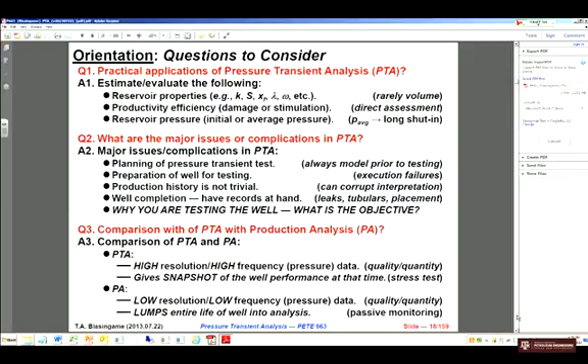So this is actually 30 years old, a little more, but it's almost exactly accurate to what we would be looking at today. Not a lot of things have changed since then.

In this case, you have a seal assembly here, so there's a wireline comes down through here, and you have a gauge, but this is sealed off. Being sealed like that means hopefully we don't see too much pressure come up. But this one over here actually has a valve in it that isolates the bottom. You've got packers in both.

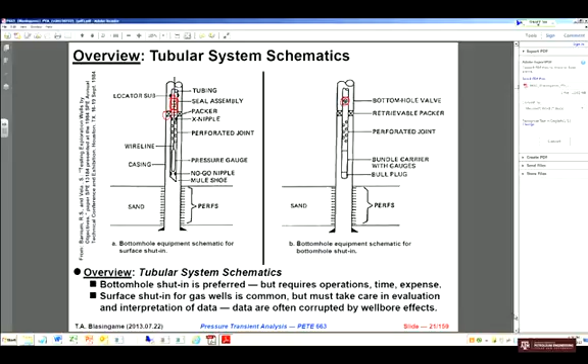This is more or less what one might use on a drill pipe test. The gauges here are in carriers, they're memory gauges. They can run sometimes up to 90 days on batteries. This isn't drawn to scale.

How do you think you're going to have enough batteries to run these gauges for that long? Have you seen these battery assemblies? They come in 10-foot lengths, so they just keep stacking them onto each other, just like a giant flashlight, screwing them together to get more power.

There are some new technologies for generating power downhole. I worked on a few of them. They never came to anything on my watch, but I understand a company has developed a technique for putting a current through the wellbore, through the casing and through the tubing, which isn't going to be a very efficient connection because the tubing's hitting the casing all the way down, but they claim they get enough power to run things.

There are all sorts of ideas, like a turbine of some sort that would power a battery. There are some smart materials that have been tried that would generate electricity from thermal changes. But for the most part, we're stuck with batteries. If you use batteries carefully, you could probably be down 80, 90 days. Now they're not on continuously. They've got a smart system that puts it to sleep and wakes it up to pick up measurements.

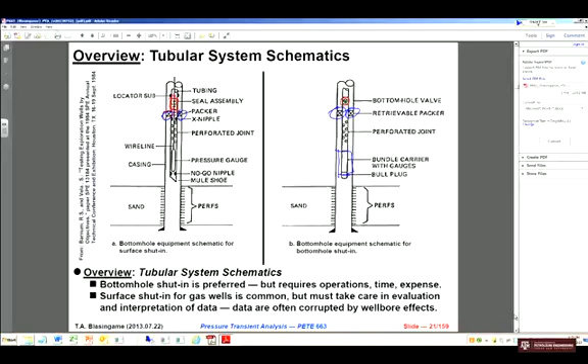So this is an example of a DST. Does anyone know who Barnum and Vela work for?

No? You got your thingy? Yes. They work for Exxon.

Okay, and so Exxon has a formula for everything. If a light bulb goes out in Jakarta, there's a book in Houston that tells how to change it.

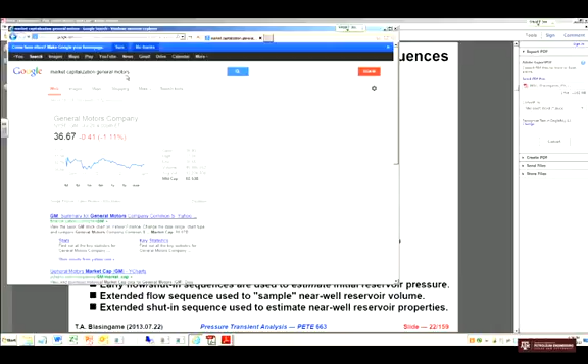$100? No. 465, or 365? What does it say, the price is right? Total market cap. Oh wow, you're pretty good, did you know that? Yeah. How much is Cisco worth? 200? 136 - Cisco was supposed to be the first trillion dollar company. How much is Toyota worth? 200. How much is General Motors worth? Holy shit. Hey, watch your mouth on this phone here, boy. Yeah, there was a time when Toyota could have wrote a check for General Motors during the bailout, and that would have been the end of that discussion. I know, leave politics out of the bedroom.

All right, sorry, I meant every hour. My mistake, thank you very much, Sam.

Okay, so then they shut it in again, and here we go. Now Jeffrey, why did I draw it like that? I drew it as though it was not going all the way back up, but in fact it does go all the way back up, right?

Why? Because we only produced it for how long, Sam? Since you can count better than me, 12 hours? 11 hours - from here to here. That's not 11, that's 9, sorry. 24 to 7, that's 11. No - 1, 2, 3, 4, 5, 6, 7, 8, 9, 10, 11. I can count, that's 11.

Sorry, where did the 100 psi come from again - the one on the 16th, hour 16 on August 3rd, the very initial point? Here? Yeah, this is the mud column. Oh okay, I get it. So what's happened is we've got a well bore full of mud, and obviously to keep the well from flowing, we have to flush it out.

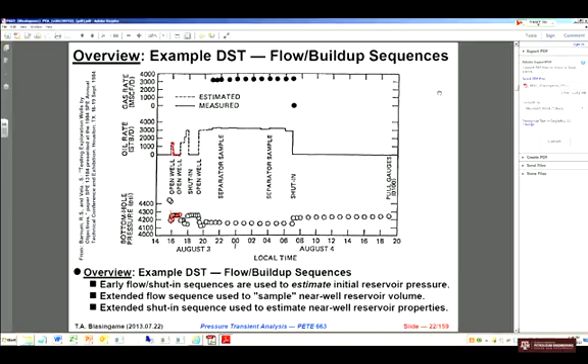All right, we'll leave that. Okay, now this is straight out of the Schlumberger book. Oh, by the way, why would Schlumberger do that again?

They want to sell services. They pushed the impulse test and they pushed the multi-layer test. Actually, that was Dr. Economides' baby. I don't know whether it was his idea or something she ended up on, but in the late 80s, they were really pushing multi-layer testing. How do you do multi-layer testing?

Single-layer testing is obvious—everything comes out of one zone. Multi-layer is going to be more difficult, right? Yeah, some isolate them by packers. That would end up being multiple single layers. And you're right, that would be doable.

But what if you're going to try to do them all at once? Multiple heights into the wellbore. Now, you would use a device to check the flow rate coming out of each zone. That was their desire, to use a spinner tool, which is kind of like a basket full of pedals that turn. What's wrong with that?

These things are notoriously inaccurate. And I know they say they're accurate to this percent or that percent. We already had this talk about what errors do to deconvolution. They'll have an effect with convolution too. If you're looking at 20% error, you've got a mess on your hands. You're going to end up with something that doesn't tend to a solution.

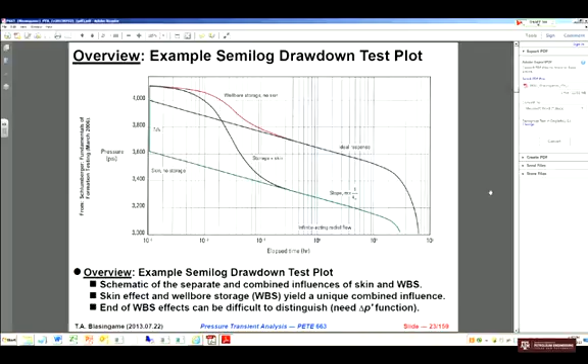A qualitative question: this method was developed for vertical wells. Do you think they'll redefine the derivative for horizontal wells? The simple answer is no, but the truth is there are horizontal well derivative functions. But what people have decided to use, kind of like using the dollar, is to go ahead and use a radial formulation because they don't want to have to convert everything to something else. The radial derivative formulation, it's just a coincidence. This derivative formulation where you're looking at y prime equal to x dy dx.

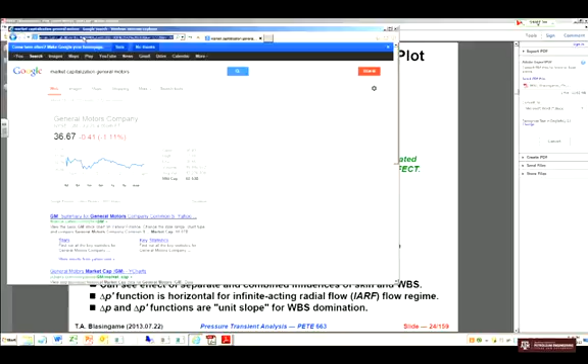Give me a heart attack. Okay, so you come over here.

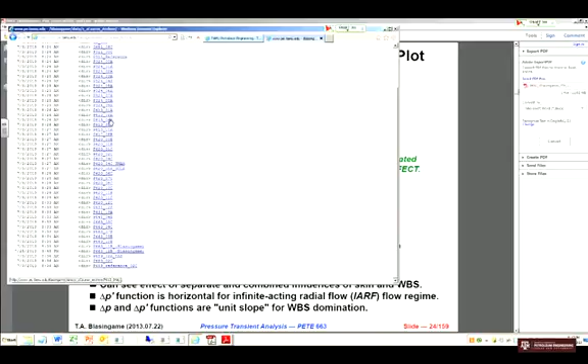How'd I do that? The course archive, PETE 324, 09 is fine, reference is fine, course notes is fine, pressure

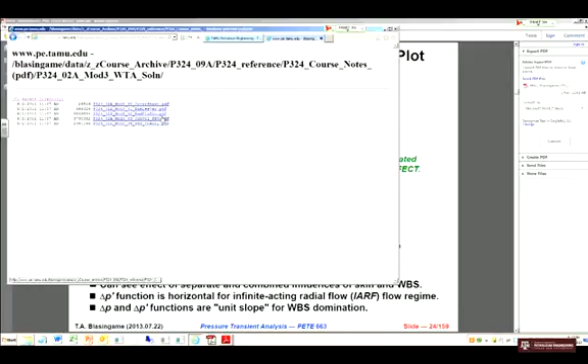Transient solutions, these are the fundamentals here. This is how you derive the solution from the diffusivity equation. I'm not going to bother with that. And then these are the fundamental solutions derived from that.

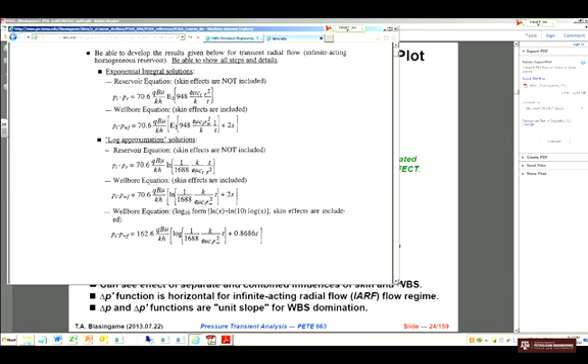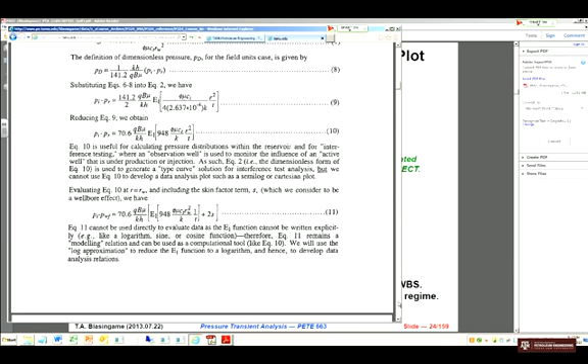This is what I was telling you a moment ago. This is the definition of this. We just did this, right?

Only I have it backwards. How did I do that? Do I have it backwards? Yeah. How did I do that? We had it upside down again. You had it. Oh. You know, it's free, so.

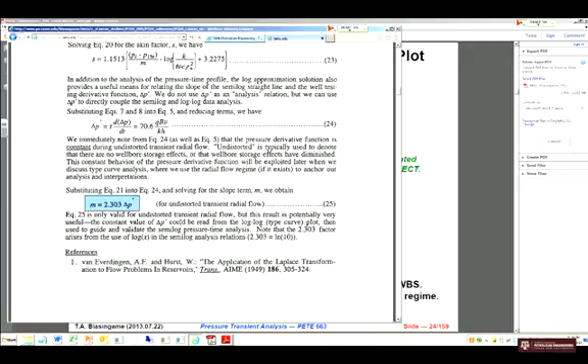And then the next one is for buildup. And you derive all the equations here for buildup.

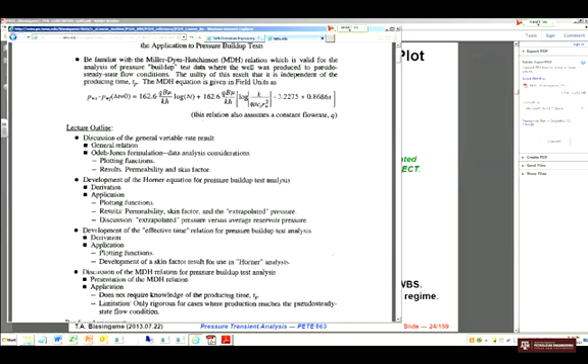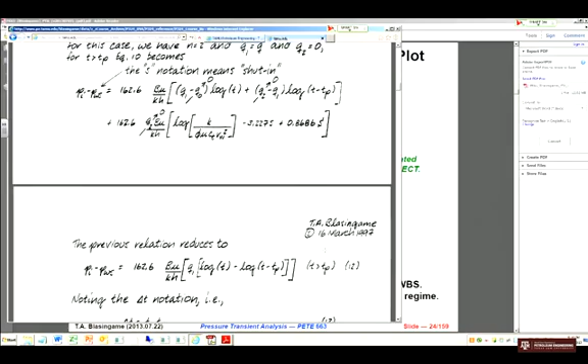This is all by hand. And you can derive variable rate buildup, single rate buildup, and so on. Again, all this really is to orient you.

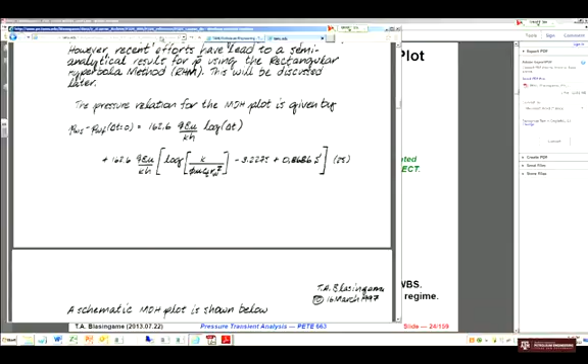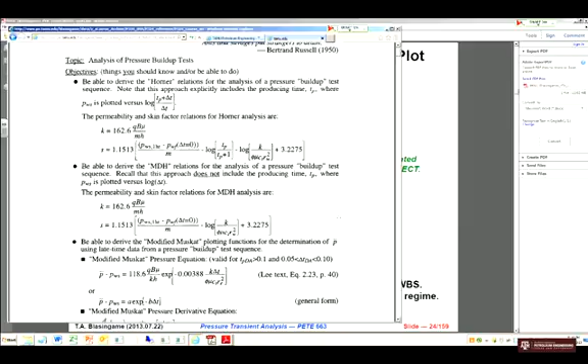And you have the pressure buildup analysis sheet, and here's all the equations for calculating things with this. Sorry about getting that term upside down. There's an example that's all worked out.

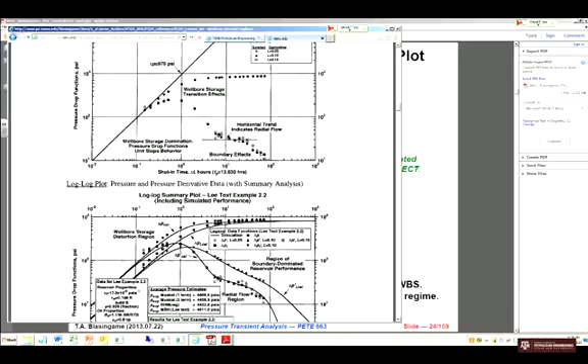So here's the wellbore storage effect. Here's the line that pours through it. Here's the horizontal radial flow trends. This is a data set that's sort of a simulation. It's actually taken out of a series of texts. So let's come back to this.

We had our barber pole here and here, correct? We have an equation for wellbore storage over here. We have an equation for radial flow over here. What do we have in the middle? Transition. Nothing. We don't have a transition equation.

This is a teaching moment. Everybody ready? Wellbore storage means wellbore only. The only thing we're getting out of this is the properties of the wellbore. In particular, what properties? The volume, which is here. How valuable is that to you? It's not. You already know the volume of the wellbore.

This becomes what? It's like a signpost. Wellbore storage. There's no reservoir value from this point. Yes? It can't, although it can be tested, used to test hole integrity, right? You know, in theory, that's probably not a bad idea, but the equations, while they're rigorous, the information that you put into them isn't.

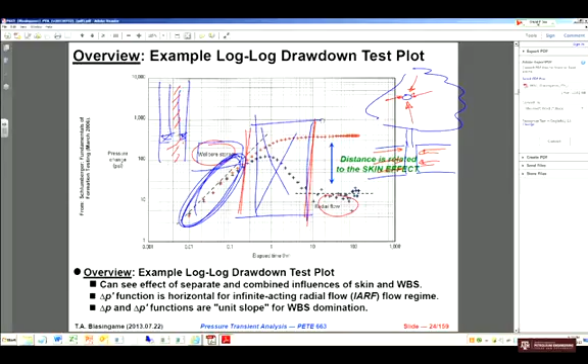We can see the radial flow lines. They're coming in like this. They converge in radial flow like this. What equation describes that? We already went through it. It's the pressure and the logarithm of time. So what do we get from radial flow? We get permeability, and we can use this to estimate the skin factor. All right.

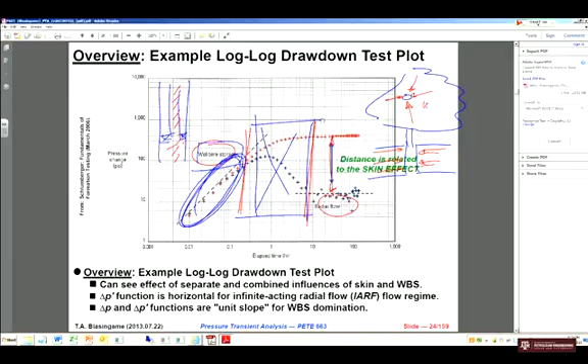So what do we get from the wellbore storage region related to the reservoir? Nothing. What do we get from the transition region? Nothing. Is anybody disappointed yet? Okay. Welcome to reservoir engineering.

So the moneymaker part of this plot is where? After 10 hours. And this is an idealized example. Definitely high permeability.

There's no value in that data. I'll teach you, you'll learn, you'll make calculations, but there's no reservoir value in that data.

So if you could, what would you like to do? Exactly, you would like to move this hump, or you'd like to remove this hump over to here. And of course, that pressure trend is going to be like that when you do that, okay? But that ain't going to happen.

You said downhole shut-in. We can use downhole shut-ins, but it's not going to totally eliminate wellbore storage. What I'm really trying to do is be exaggerated and say you're never going to not have wellbore storage. You're going to always have some. Okay, questions or concerns?

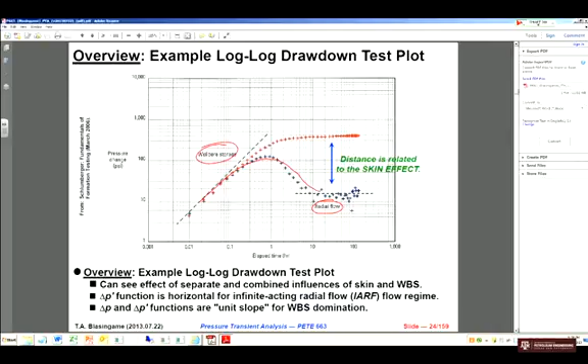It'd be nice if we had such an equation. Any ideas on how you create it? No? You weight the two functions. Trying to remember if I had it in here.

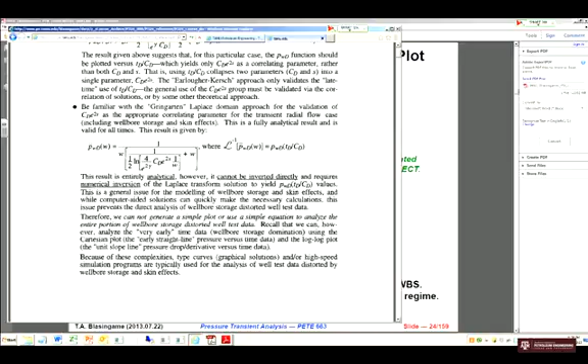Yeah, okay, so this is an approximate form of the wellbore storage concept for radial flow. It's not an equation that you can use. This is the behavior in the Laplace domain, so this is the overall relationship. Dennis is the only one who's going to understand that. And then this is an approximation that can be derived for wellbore storage. This is the solution that governs the reservoir, and this is a multiplicative solution that represents the wellbore.

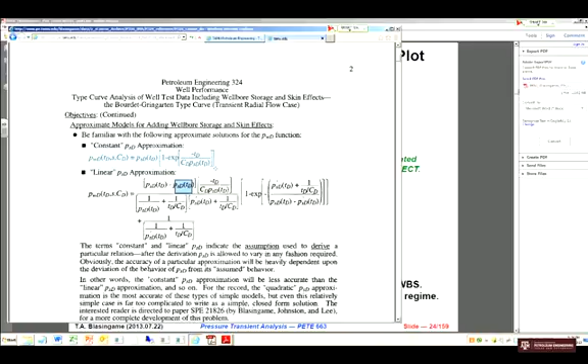And then there's another formulation of this that has the solution and its derivative, as well as the storage component. Does everyone see what would happen if you had a function like this? No? What's going to happen? Okay, but what's going to happen is this particular function will model wellbore storage over here, transition over here. Exponential - correct.

There's an exponential decay term from what would be this extrapolation into what would be that one. Okay. But it is not accurate enough to use something like that. I just wanted to point out that it's there if you wanted to try it.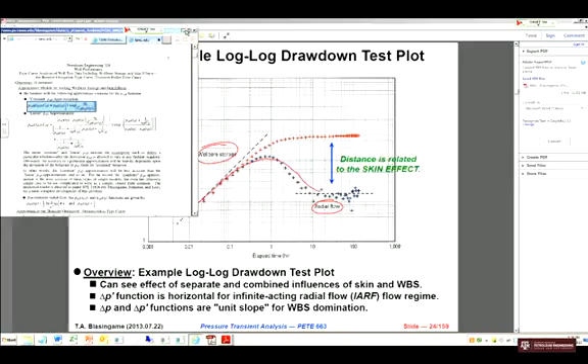Sorry, your old man should have gotten more sleep last night. At least I didn't sleep in the car driving down.

Do the Excel thing and make the min and max switch them, make it flip. Yeah, that's the easiest thing to do. You can always tell when somebody makes a build-up plot going the wrong direction, that it's their first time. It's okay, it's still just as accurate.

One of the things you need to do whenever you're performing well test analysis is, once you stare at it long enough and put the model on there, you need to mentally strip the data off. The data is no longer part of the process—the model is. All of these equations reference the model. They are the model. So when you start drawing straight lines, taking points, moving things around, and calculating slopes, you're talking about the model, not the data. In your mind, once you put a line on there, just peel the data off the page, because you don't have the data anymore—you're dealing with the model. The model is the equation.

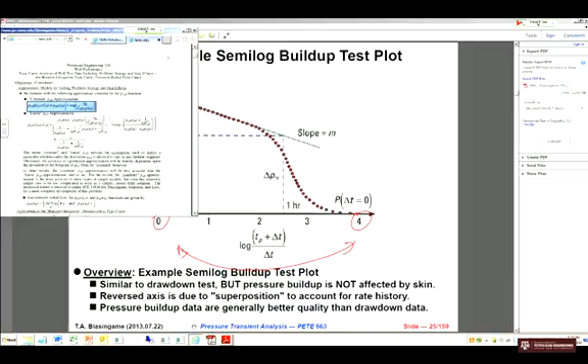Can I throw a lifeline? You know, Lifeline—X Factor, Survivor, whatever it's called. What uses a lifeline? Think, Who Wants to Be a Millionaire? I want to see if Sam would give me a hand. Okay, so who can I throw a lifeline to? This is a hard crowd, kind of hoping for a little more love and understanding, but I came to the wrong place. $1 million question.

What, you want to do it the easy way or the hard way? Hard way is good. You got the terms for skin factor? Sorry, the rate. Let's do the mouse.

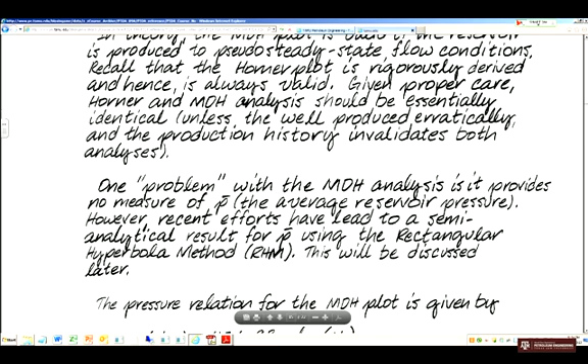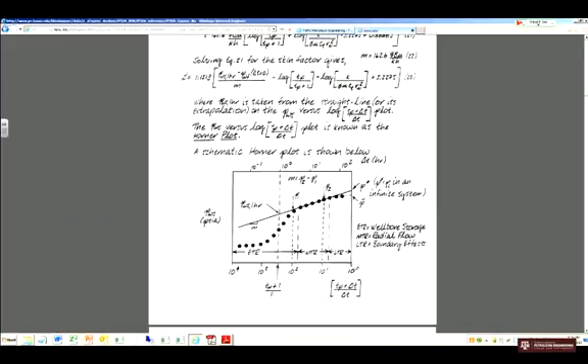Okay, so here's the cartoon. Pressure buildup test: the data start over here and work their way over to there. It's plotted from 10 to the 4th to 10 to the 0.

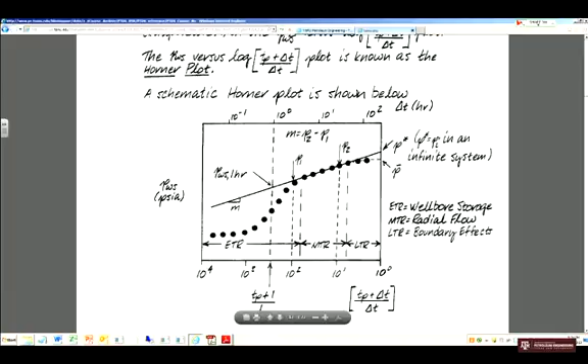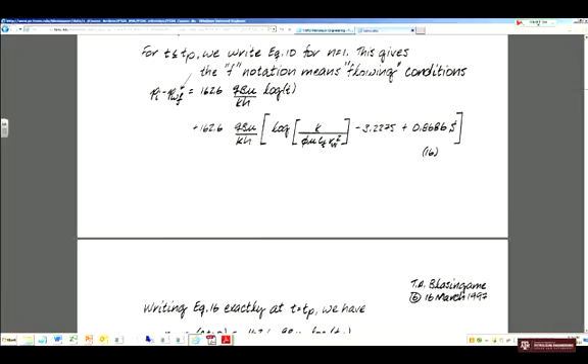Scrolling up, the equation that we had for the buildup is where? Okay, so we're going to just keep working our way down, down, down, down. Okay, I'm on the wrong one, sorry.

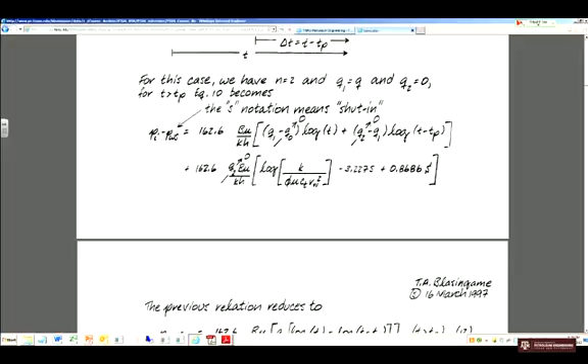So we take two equations, the first one and the second one, and there is a skin term here, right? What's the skin term multiplied by? Zero. So the plotting function effectively knocks the skin factor out. The final equation looks like this—that's the equation of the straight line. There's no skin factor term. Why? Because the zero rate knocked it out.

Now you want to put it back in—you want an equation with skin. Where is the last piece of information that has skin? Before you shut in. Perfect, keep talking, you have the... So instead of referencing initial pressure and shut-in pressure, what are we going to reference? The last pressure in the drawdown, because that pressure has a skin factor in it, right?

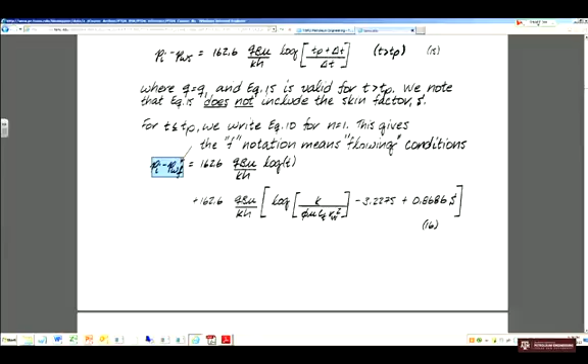So now we reformulate the problem. You can see what I'm trying to do—exactly like what you just said, so it does not include the skin factor. Now I'm going to reformulate: I'm going to solve for pressure minus the flowing pressure, which does have the skin in it, and select that behavior at the total producing time, TP.

So I've got this equation that has skin in it, referenced to initial pressure minus the flowing bottom hole pressure at this time. This is a single value, correct? If delta T equals 0 on that, okay, this is a constant—all of this is a constant. Does everybody understand that? The pressure drop at delta T equals 0 is dictated by that equation, taken at time equals TP. So that is the last drawdown pressure. So it has what? It has skin.

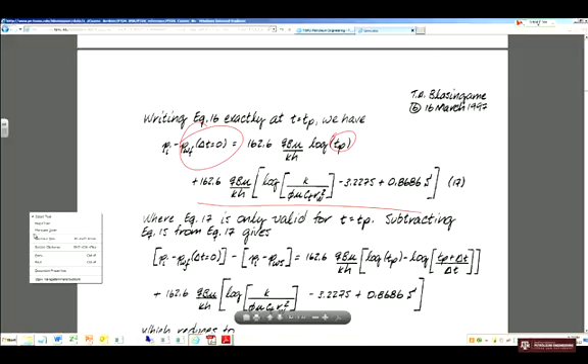So then we take that and combine it with the other buildup equation, and look what happens—we combine it with the equation that doesn't have skin. Where the hell is my mouse? And what we end up with is a new plotting function for the x-axis. And we end up with this. Let's pick on someone other than Jeffrey—what are the units of this new plotting function?

The time unit T. It's time multiplied by time, divided by time, so it's time. So what do we call this? We call it effective time.

We've actually known about this equation for quite a while, because this is how we originally formulated the pressure buildup formulation back in the 50s. But a fellow by the name of Ram Agarwal, who did his PhD here, worked on this problem late in the 1970s. He wrote two papers that should never have been published. Okay? And this was one of them.

This was the effective time. Why never published? It's really hard to explain, but it just wasn't something people wanted to see. There were people that said it was too simple. We recently had a publication that was turned down that we performed, an excruciating amount of work to prove that a simple concept wouldn't work. And we actually had a technical editor write us a letter back saying, I appreciate all the work you did, but it's obvious that this would never have worked, no matter what.

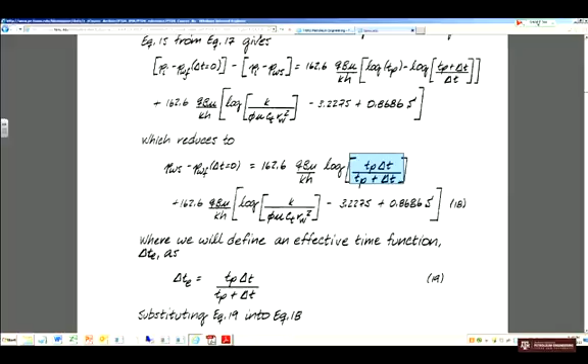I know what you're saying. This is very confusing because the data plot hasn't changed. What has changed is which equation we're using. Okay? But the Horner plot, the one that doesn't have skin factor in it, all it tells you is how to interpret the so-called semi-log straight line, this one here.

That does not have skin factor in it. This is the equation for a buildup. You have the initial pressure of the system, you have the shut-in pressure of the system, you have all this. Okay, I see what you really want me to tell you. Do you see it yet?

It's reference to initial pressure. When the reference is initial pressure, there will be no skin in this equation.

So what we did was essentially reverse this, and the reference is now the last drawdown pressure. Delta P here is PI minus PWS. Delta P down there is PWS minus PWF at shut-in. We changed the reference, and by changing the reference, we put the skin factor back in. But as far as the plot you're looking at, it's still the same. This is an interpretation mechanism.

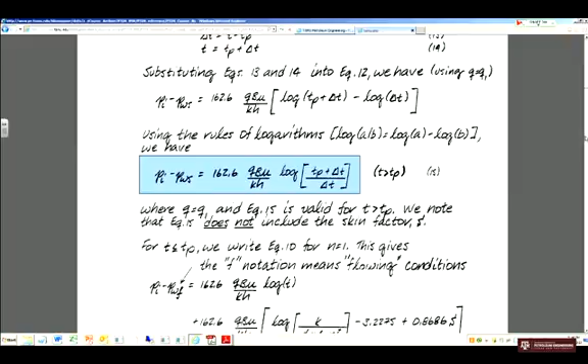And I know people are going to say, but the plots aren't the same. What I'm trying to say is the Horner plot has its trajectory, the effective time plot has its trajectory. They all have a semi-log straight line, they all have a point where you can interpret something. You can use this formulation, the Horner formulation, Tp plus delta T over delta T. You can put that on the x-axis, and you can make this calculation. But then what you would do is come back and use the solution that's here for the skin factor.

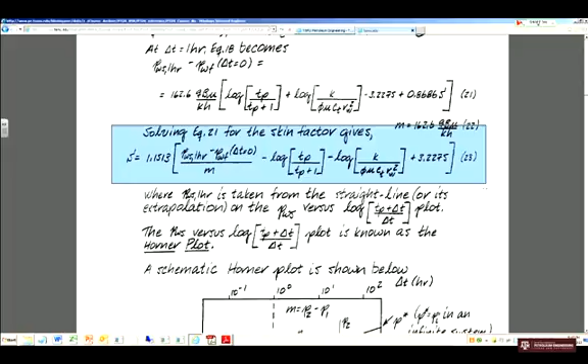So quickly I'll go to a cartoon and explain all this again.

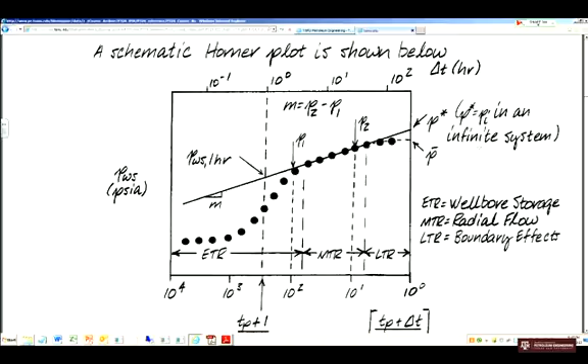Okay, so in this case, it is a logarithmic graph. The axis here is Tp plus delta T over delta T. This is a Horner plot. The axis here is the shut-in pressure. So down here is very early time, this is very late time. The individual points are here.

And then we draw in the trend, the straight line - I believe it was equation 18. So there's equation 18. The slope of this line right here, only that part, is the part we're looking for.

You calculate the slope. How do you calculate the slope on a semi-log axis, people? What's the easy way? You take this point, and you go ahead and take this point. How many log cycles are there? 1, 2, 3, 4. This pressure difference divided by 4 log cycles - so whatever this delta P is, MSL is equal to delta P divided by 4.

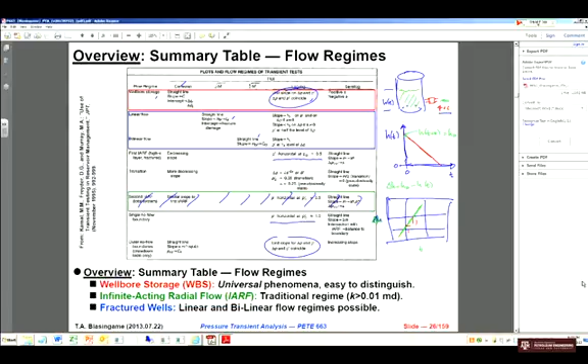Somebody now explain the pseudo-steady state part. All of this rhetoric has been to explain this. But this is identical to that. Yes, no, maybe? But the derivative on the... okay, let me try this. Stop guessing, G. I'm really enjoying this part of the game, by the way. How do I turn ink off?

You ready, Jeffrey? I'm feeling good. All right, so what I'm going to do, and then I think I'm going to quit because I'm exhausted, so I'm going to explain this wellbore storage thingy one more time. You guys want to use Microsoft Ink so we have more colors? Yep. Color, color, color, all right?

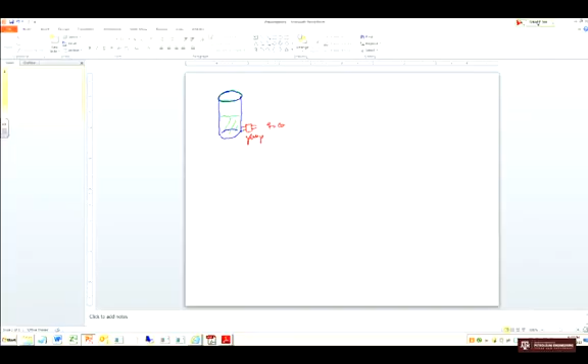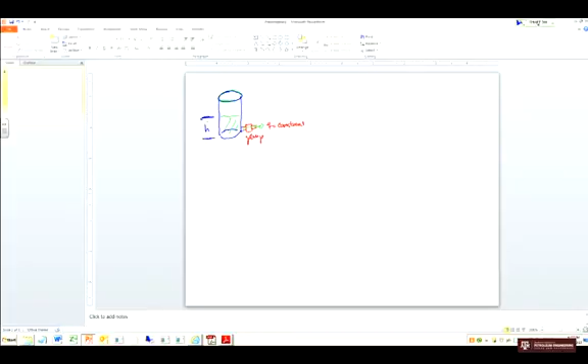Okay, so we have a perfect pump. We have a pump with a rate constant. Comes out like that. The height here, this is H0. And of course this would be 0 down here. So we're going to look at this fluid height just like we did before. Is everybody comfortable with this so far? Okay, so if we plot...

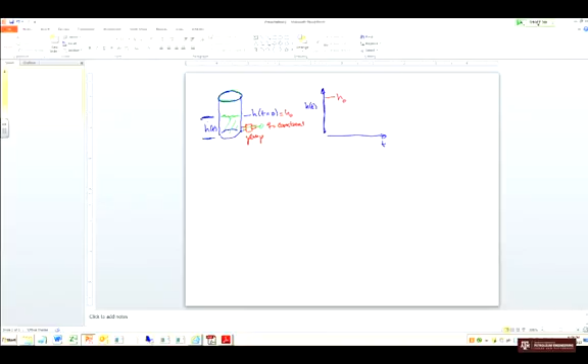H of T versus T, what's that going to look like? Jeffrey, we're going to give you a redemption piece here. Here's H0. Okay, now what's going to happen? Straight line with a negative slope. Negative, I don't know what it is because we didn't specify a model. But this is H of T.

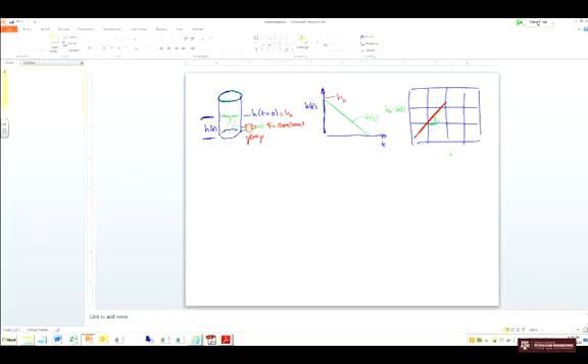Now I want to plot a log-log plot. And on the log-log plot, what am I going to plot? Plot H0 minus H of T, and then T. Everybody's fine so far, I hope, right? Okay, so it's the same thing over again. We're going to have a unit slope trend. And that's for the wellbore. Everybody happy?

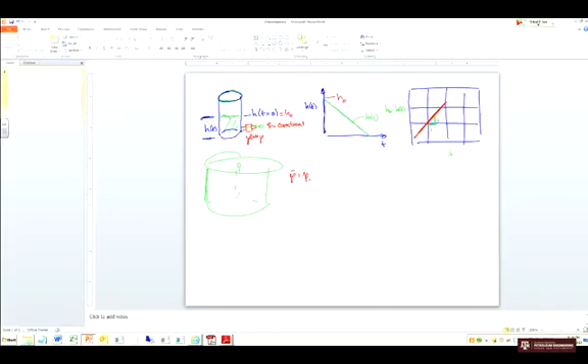And what if I take a tank that's a reservoir and I fill it with a constant compressibility fluid? Does anybody remember the equation for that? The material balance equation. It's P bar is equal to PI minus... what? 1 over NCT, sorry, minus, not equal, BO over BOI times what?

We'll say P bar is equal to PI minus M pseudo steady state times what? NP is equal to the integral of Q of T dt. If Q is constant, then what is NP? Dennis? NP is equal to Q times T. So we're going to say constant rate, and that'll be what? So I'm going to take this out. Let's say 1 over NCT, BO over BOI, Q times T. Say Q constant, all right?

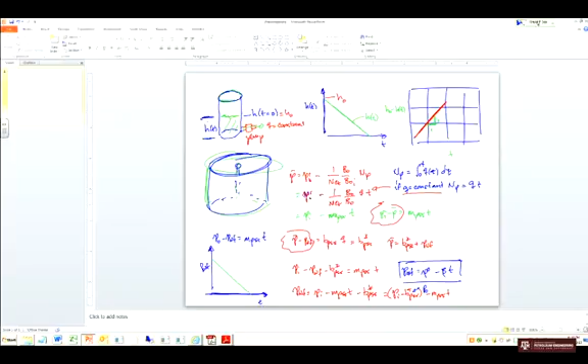I just did this wrong. Why didn't you let me do that, Dennis? Okay. So this is going to be, what's the slope of this? M pseudo-steady-state. And P0.

Comments? So what happens when I plot it on a log graph? Then what is this different slope equal to? The same slope, they're both the same slope, right? But it'll be out here. Comprende?

Reservoir. Okay? What connects them? The volume... sorry, the volume is... what? Sorry, I couldn't hear you. Oh, what's in the middle? Yeah, that'll be the transient radial flow part, right here.

And then this is the IARF, the infinite acting radial flow. So this tells you the volume of the wellbore, if you wanted to think about it that way. And this tells you the volume of the reservoir. Or sorry, this is proportional to the volume of the well, and this is proportional to the volume of the reservoir. Okay?

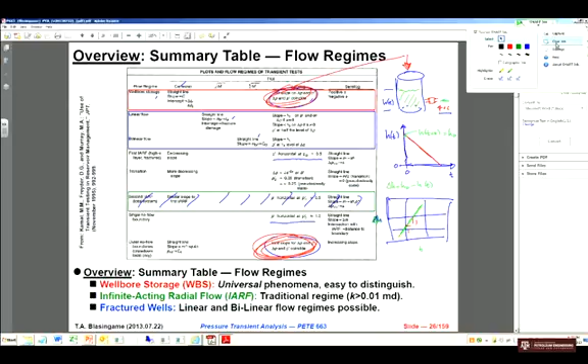Okay, now getting back to something a little less tedious. Why did I put a dashed line around this and this?

Do they have a rate that is not equal to 0? These would be secondary choices. What would your primary choice be? The buildup. The problem with both the injection test and the drawdown test is that the rate has to be constant, not literally, but at least directionally. There are ways around the variable rate, but they're not constant.

From a drawdown test, we can estimate reservoir behavior, permeability, skin factor, fracture half length, reservoir limits, boundaries, and we could also assess horizontal well features, pressure, conductivity, etc.

For the injection or falloff test, they claim you can do mobility—I'm not sure about that—skin, pressure, fracture again, location of front, boundaries, and reservoir limits, sort of the same thing. Now for the build-up test, we get reservoir behavior, permeability, skin, fracture length, reservoir pressure, and boundaries, identical to the drawdown test. But our preference is going to be the build-up test.

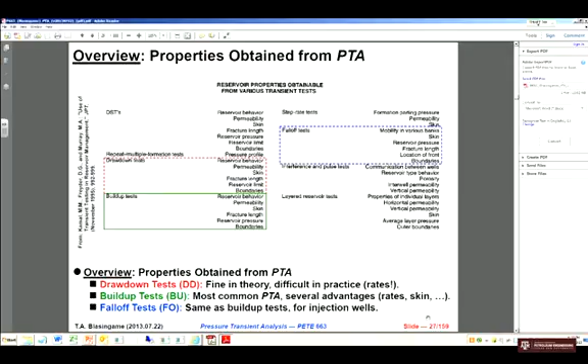It's just sort of a diagram or a listing. What is the reservoir limit? The reservoir limit test would be where you're going to this part—that's your reservoir limit. We're talking about infinite acting radial flow here. This is boundary effect. I'll go ahead and label that for you. This is boundary effect. Reservoir. Boundary effect.

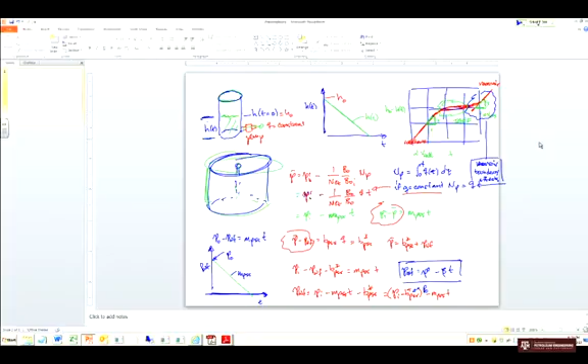This is another sequence of plots. This was sort of an early effort, or maybe a late effort—done in, what, 1983? No, 85. What Ershaghi and Woodbury were trying to do was show characteristic shapes. At about the same time, people were trying to start doing artificial intelligence on well test analyses. There was a tool to do this, but then the models kept getting successively more complicated, and I don't know whether that tool was maintained or not. It came out of a group at Stanford. It was in the Kappa software suite, or it used to be.

What Ershaghi and Woodbury were trying to do is show certain flow regimes and how they behave. Wellbore storage is a straight line on a log-log plot—we already know that, we've already been working with that. Infinite acting radial flow is a straight line on a semi-log plot, so this is a check mark, this is a check mark, we already studied both of these. Then we have formation linear flow, which may not seem logical, but this is going to be 2 to 1. And if this is 2 to 1, then that dictates square root. I am not a fan of square root and quarter root plots. Do you know why?

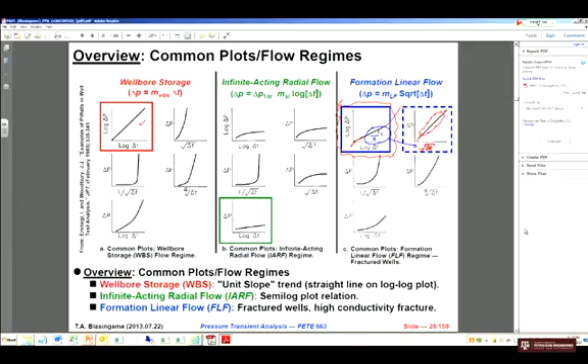Better to use derivatives, like what we did. So the next slide is going to be derivatives, if I remember correctly—and I do. This is something I had my graduate student draw up. This is incorrect, sorry about that. Oops.

Sorry, wrong reference—actually, they may have done this, but we enhanced it. This is from a student of mine. What we're looking at is an unfractured well in a homogeneous infinite acting reservoir, which is radial flow. You can see the logarithm of dimensionless pressure has a hockey stick shape—there's your 1 to 1, and then it rolls over. Then we look at the logarithm of dimensionless pressure derivative, and it has a hump, just as expected. Then we look at the logarithm of the beta derivative, which is the derivative divided by the pressure drop. What that tells us is that during wellbore storage, we get a unit slope line here and here, and that translates to horizontal behavior here. This was sort of a diagnostic we were trying to put out there to get everybody to realize this was constant because it was dictated by this formulation.

The next example is also a homogeneous, unfractured well, again radial flow. Does everybody see what we saw a moment ago? Here is your wellbore storage trend—so this is wellbore storage, and this is your reservoir trend.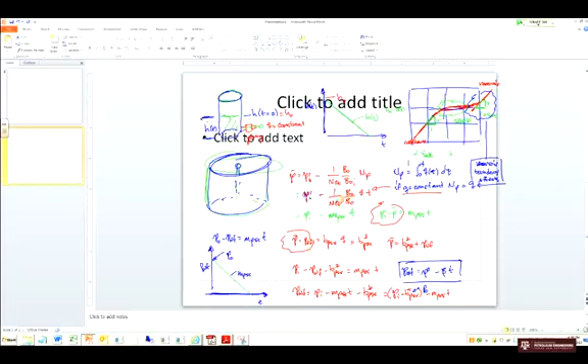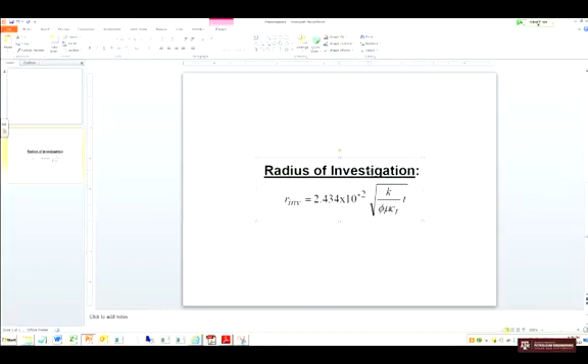You could just go to the layout and select blank slide. Yeah, I could go start drinking again. Yeah, I know, you're telling me. All because of you.

Much. Alright, so the definition of dimensionless pressure for this case is PD is equal to 1/2 natural log of 4 over e to the gamma, RD squared over 4TD. I believe that's right. No, over TD.

Hey, Cindy, say it forward. Okay?

So, what is the equivalency of that straight line? Hello? Would you two girls stop fighting?

So in this graph, it's not obvious, but what I'm going to do is I'm going to solve this equation. So that's equal to 1/2 natural log, well, let's say that this is equal to 0. Ready? So we're going to say that P, i equals...

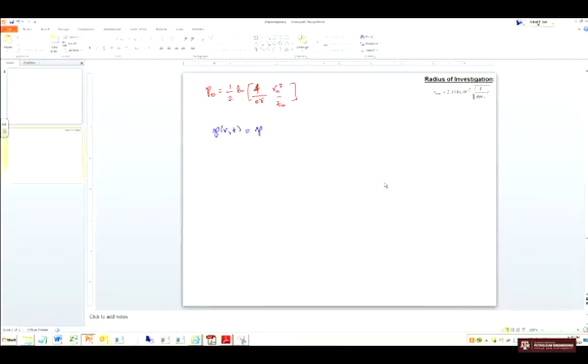Alright, so P of R, T is equal to Pi, therefore PD is equal to 0. What is 0 multiplied by 2, Dennis? 0. And 0 is equal to 1/2 natural log of 4 over e to the gamma, RD squared over 4TD. Stop writing 4.

EXP of 0. What is EXP of 0? 1. Did I just do that? I cannot believe it, how did it start? Yeah, I know, I'm sorry.

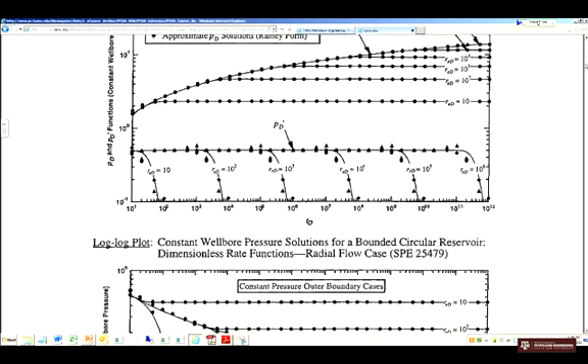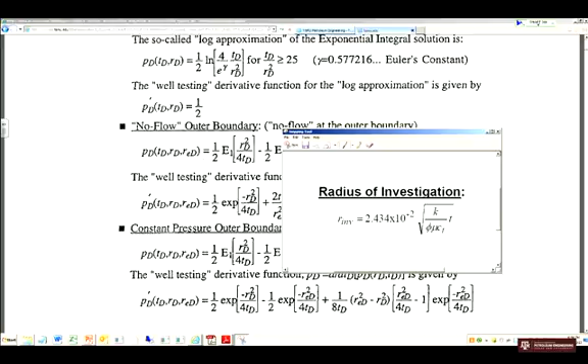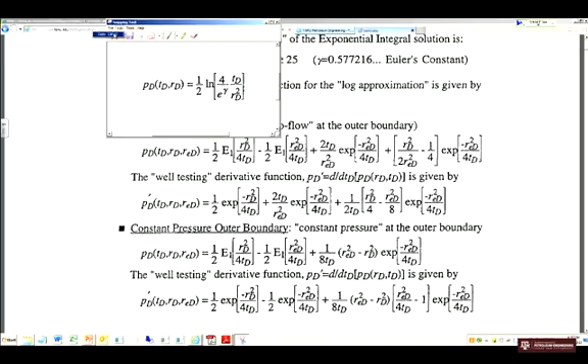I really screwed that up. Just for that, you made me do it over again.

Alright, so what we're gonna say is that PD is gonna be equal to 0, alright? The line's gonna intersect, okay? So what happens, if that's equal to 0, then all of this is 1/2 times that quantity. So what's that gonna be?

Zero is equal to the quantity. Basically, the term in the bracket is equal to 1. Okay. So that tells us that 4 over e to the gamma, TD over RD squared is equal to 1.

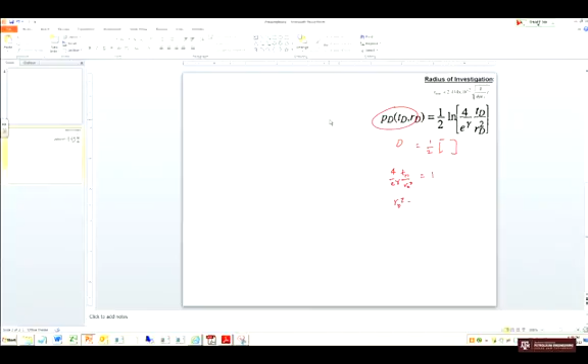Okay, so that means RD squared is equal to 4 over e to the gamma, TD, and that's basically our starting point.

That means RD is equal to square root of 4 over e to the gamma, square root of TD. What's RD? RD is equal to R over RW. What's TD? Dennis?

0.0002637 times K over phi mu C T RW squared times T, right? Okay, so that's going to be R over RW.

It's going to be the square root of 4 over e to the gamma. And all of this will factor out except the square root of TD, but I'll go ahead and leave it in there. So that'll be the square root of 0.0002637, square root of K over phi mu CT R squared, times square root of T.

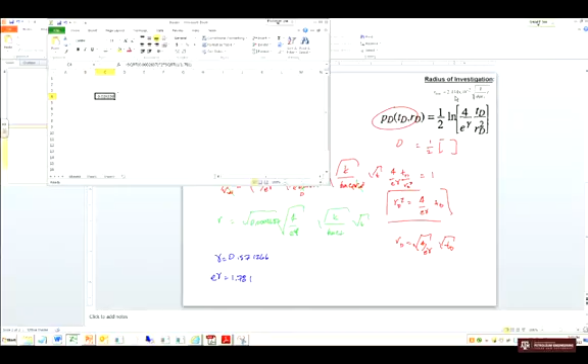So I got 0.02434. Let's check something. That's one definition of the radius of investigation.

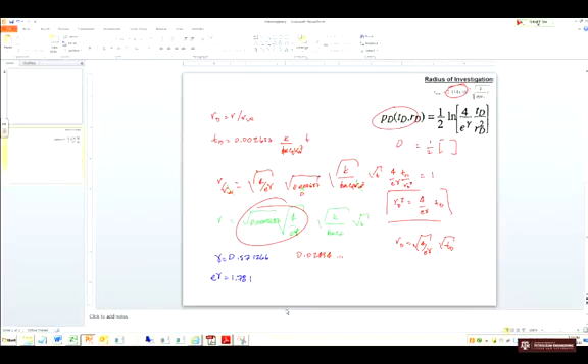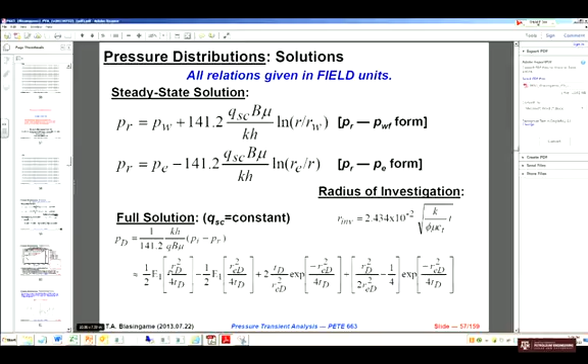So what I want you to focus on is that you have a steady state pressure profile moving through the reservoir during drawdown. It's not exactly steady state, only the straight line portions correspond to the steady state part. And like you were implying, Jeffrey, it extrapolates to touch PI, but it can't do that in reality. It has to turn over, and where it gets that turnover from is in these exponential integral terms. That's where it gets the turnover.